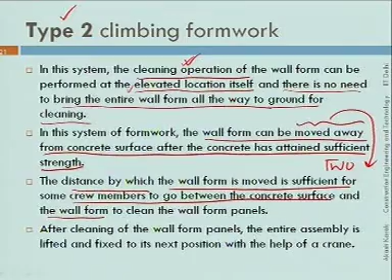In one way, you create a certain distance by which the wall form is moved, so that crew members can go between the concrete surface and the wall form to clean the panels. Once the cleaning is over, the entire assembly is lifted and fixed to its next position with the help of a crane.

So type 1 also requires a crane, and type 2 also requires a crane. But the crane time in type 2 is less compared to type 1, because the cleaning operation is being performed at the site itself.

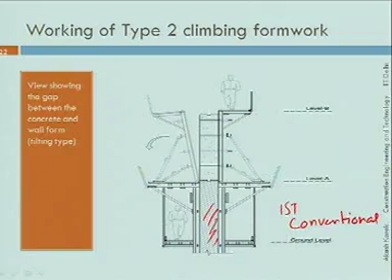I will just show you how it looks like. So the first one or two lifts, you do using the conventional manner. This is done using the conventional manner.

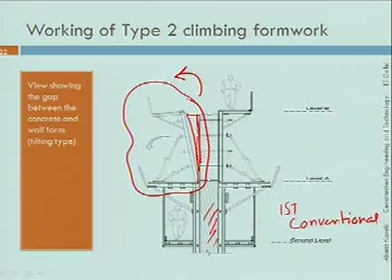Exactly in the same manner you use type 2. Now the only difference is, you can see here, the shutter was like this earlier at the time of concreting, but now it has been tilted, so that this gap has been created, and a person can go inside this gap to clean the shutter.

Is this clear to you? How the cleaning is done? Yes, we are not bringing these panels onto the ground until and unless they are cleaned. The cleaning is done at the elevated location itself, here itself.

Not clear? See, you have a tilting device, this is the shutter, you have some device through which this rotates, and now it takes a shape like this. So there is a gap which can be utilized to clean this portion. Is it clear now?

Cleaning means you have to clean the shutter formwork panels. So, for cleaning, suppose this is the wall that you have cast, and you want to create some gap. Let us say you have tilted the shutter like this. So now this is the gap, and through this gap you can clean it. Is it clear now?

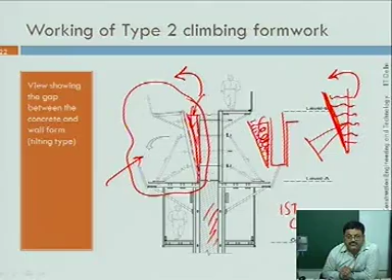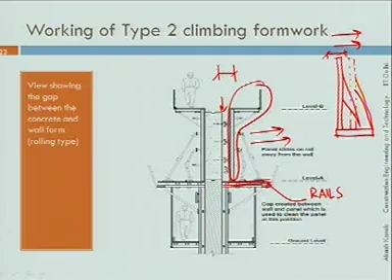Is the slide clear to you? Yes. So what is happening is, you have this shutter here, mounted on rail, mounted on rail. Now, you want to create a gap, so you are moving it backwards. So now the revised position of the shutter is something like this, so that you have this much gap. Is it clear? So we are pushing it away from the concrete wall. Is it clear?

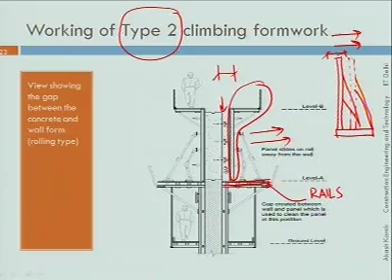Okay, so this is what is type 2 climbing wall formwork. The only difference here is the cleaning is done at the elevated location itself. Cleaning is performed at the elevated location itself.

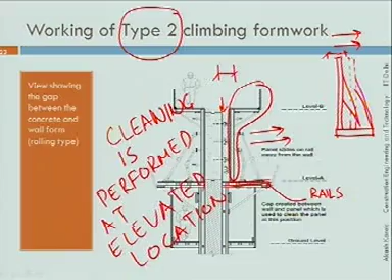Now, once you have done this cleaning, a crane is used to bring this shutter entirely onto the ground surface, and from there onwards the process is the same. See, there can be one more situation in which the shifting of panel can be made directly to the next level. So from here directly you can bring it at this level, no need to take it to ground.

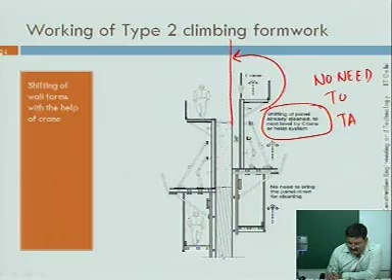Is this clear? Yes. Okay, now the advantage you might have noticed is, number one, scaffolding from ground is not required. Ground is not required. Second advantage is no need to take form panels onto ground. So even if you are working in a congested area, this system is quite useful.

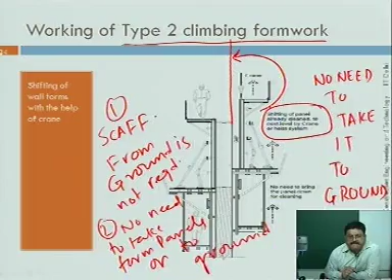So any doubt in type 2 climbing formwork technology class? Okay, then these are some of the advantages I have put down in this slide. The cycle time can be between 2 to 4 days. Cycle time means dismantling of shutter, tying of reinforcement, assembly of formwork, pouring concrete, and then dismantling. So the time from dismantling to dismantling, you consider as cycle time. It can vary between 2 to 4 days.

The crane time is considerably reduced compared to type 1. The system has an inbuilt safety mechanism, so you can work probably at any height, possibly on all heights. So height is not a bar if you are using this system. You can design this system for a wind speed as high as 150 km per hour, so even in very high windy situations you can use this system.

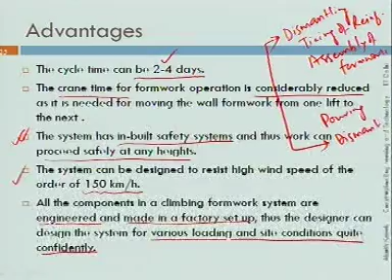All the components in a climbing formwork system are engineered, that means they are designed and made in a factory setup. Thus the designer can have greater confidence and can design it for different loading and site conditions, because now that they are engineered, you can be assured of their properties. So your design will be much more confident. This would not have been the case if you are using, let us say, some timber. Timber is a natural product, there could be large variation in its properties, it could be affected by a number of factors, so you will have to take a large factor of safety there. But if you know the properties of certain materials, you can design it quite comfortably and confidently. So these are some of the advantages of type 2.

The only difference here is the cleaning operation takes place at the elevated location. In some systems there is no need to bring the formwork onto the ground, they can be transported directly from the dismantling location to the next assembly location.

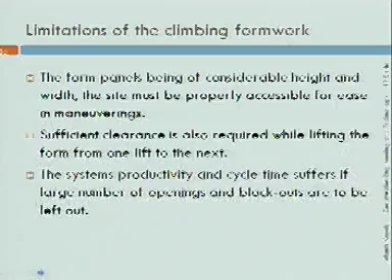Now we move on to type 3. Of course there are certain limitations of this climbing formwork. For example, when these form panels are of considerable height and width, your site must be properly accessible, because otherwise you may not be able to maneuver the crane. Maneuvering through crane would be difficult. Sufficient clearance is also required while lifting the form from one level to the next, because your crane is lifting this, so you should have sufficient clearance, otherwise it will obstruct the lifting by crane.

The system's productivity and cycle time suffers if there are a large number of openings. Suppose you have this wall and there are too many openings, here and here. You will have to make a special arrangement for the formwork for this opening, and so your cycle time would be increased.

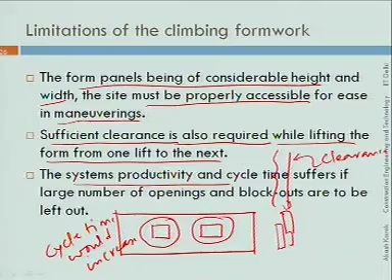Cycle time would increase under such situations. So these are some of the limitations. The site must be accessible so that you can bring in cranes and they can easily maneuver. Sufficient clearance is also required, and whenever your wall has large openings and blockouts, it becomes slightly problematic, your cycle time increases, and you may not be able to take full advantage of this.

Now we see this Type 3 climbing formwork. This is possibly the most advanced version. We also call it automatic climbing formwork. Sometimes it is also known as self-raising formwork. So you call them automatic climbing formwork or self-raising formwork.

Whenever you are using an automatic climbing system, it has an inbuilt climbing device which doesn't require support from a crane, and that's why this is one of the most advanced versions, because it totally eliminates the use of crane. So even at sites where you don't have a crane, this system can work wonders in terms of saving time as well as cost.

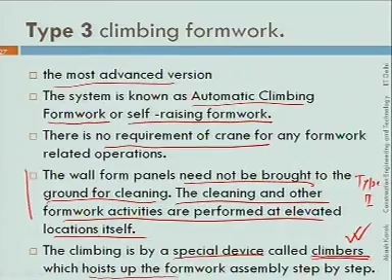Here we have an additional component called climbers, which basically move these formworks in a step by step manner. There are certain additional components needed in an automatic climbing system. As there is no crane requirement, there has to be some means through which the entire system moves step by step. I will show you how it moves.

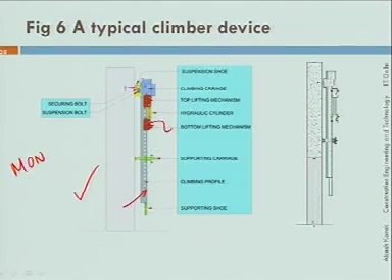Can you see this particular slide? If you look at this figure, you can notice there are two frames, one in this color and the other one here. Basically it is like monkey climbing. You have seen how a monkey climbs? When it is trying to climb, it will have load on two legs, and when it moves up, it will release that pair of legs and keep the entire load on the other.

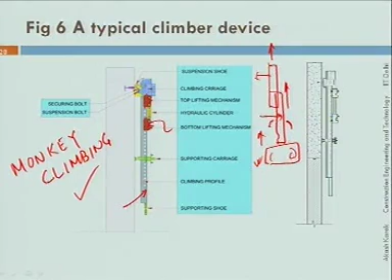On a similar principle, in most of these climbing devices there are two frames - one frame, another frame. While one frame moves, the load is taken care of by the other frame. Once the first frame has moved a particular distance, it takes the load, and then the other leg moves upwards. Can you visualize this? Just try to locate a monkey first and see how it climbs. So this is your next assignment - observe a monkey climbing and compare it with the climbing I have told you about in this lecture.

Now it has certain additional components that I will tell you about. There is first a component called the lifting frame. The bottom supports of the lifting frame are anchored to the previously cast concrete lift. There are hydraulic jacks attached to the lifting frames. The jacks pull the entire form system to the next lift location. So one very essential component here is the jack, which you can consider as the core of the whole system. These jacks are used for pulling the entire form system to the next level.

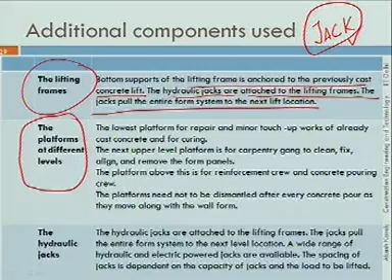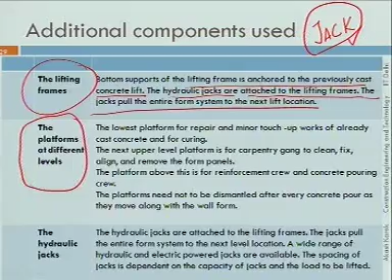As I will show you in the next few photographs, there are various platforms at different levels in these systems. I will tell you how many platforms there are. The lowest platform is used for repair and minor touch-up works. So we are at this lowest level.

Then the next upper level platform is used by the carpentry gangs for cleaning, fixing, aligning and removing the form panels. So this is the lowest, then second is for carpenters. Now the next platform above the carpenter's platform is used for the reinforcement crew and concrete pouring crew.

Now there is one additional platform which is used for climbing operation, where you operate these jacks. There is one more platform which is used for curing. So I told you about five platforms that can sometimes be there in an automatic climbing wall formwork system. I will show you a picture and then it will be clear, so wait for that time.

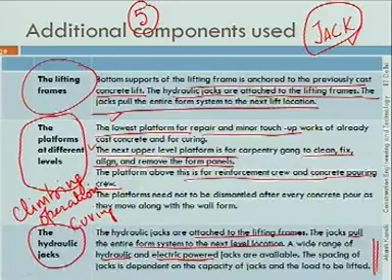As I told you, the hydraulic jacks are attached to the lifting frames. These jacks pull the entire form system to the next level location. There are different types of jacks - they could be hydraulic or electric powered. The spacing of jacks and their capacity is decided depending on the load that it has to lift. I will tell you how to design these jacks, how to find the right spacing depending on the load it has to lift upwards.

So there are few things which are additional in this automatic climbing formwork system. Number one, the lifting frame. Number two, the different platforms. Number three, the hydraulic jacks. These three components are additional in any automatic climbing wall formwork system.

There could be as many as 5 platforms, the lowest being used for curing, the next one may be used for repair and minor touch up, the next one can be used for lifting arrangement, that is your jacks may be positioned there. The fourth platform can be used by carpenters for cleaning, aligning, assembling of formwork, and the top level platform can be used for reinforcement gang as well as your concreting crew.

Now I will show you some more aspects of this type 3 climbing formwork. These formworks can be customized for a wide range of applications. Some of the applications that have been reported for these type 3 climbing formworks are pylons. You might have seen pylons which are very large structures, used for different purposes. You can use it for bridge piers.

You can use them for lift shaft. Lift shafts, you will find, are one of the most critical activities in a multi-story building. If you are constructing a multi-story building, you will find that it doesn't take much time to cast these floors, but when it comes to lift shafts, it takes a lot of time. So sometimes people use automatic climbing wall formwork for casting these lift shafts.

There are special automatic climbing formwork which can be used for constructing this natural draft cooling tower. You might have seen a structure like this, a natural draft cooling tower - they could be as high as 120 to 130 meters. They are used mostly in power plants for cooling of hot water.

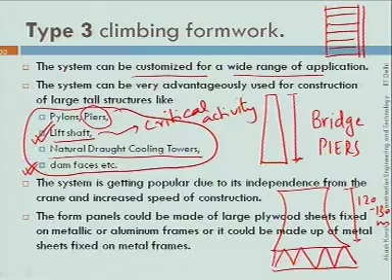You can also use this system for some dam faces. So while constructing the dam, you can use this automatic climbing wall formwork for achieving faster rate of construction. Nowadays you find there are lots of applications of this automatic climbing wall formwork. The reason is you don't require any crane, and still you can get very high speed of construction.

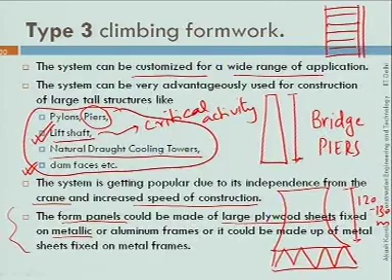The form panels used in this system can be either made up of large plywood sheets, or it could be metallic, made of steel, or maybe aluminum frames. Now I will show you how this system works, in a step by step manner.

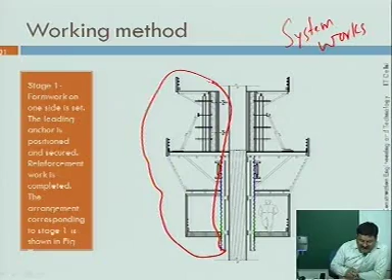Now, stage 1, you can see you have fixed these formworks on one side. Now, there is a device called leading anchor. In one of the lectures, I will give you the diagram for these anchors, climbers. I will give you the detailed dimensions and how they look, so that it becomes clear to you. But for the time being, just understand that there is a device called leading anchor that has to be fixed and secured.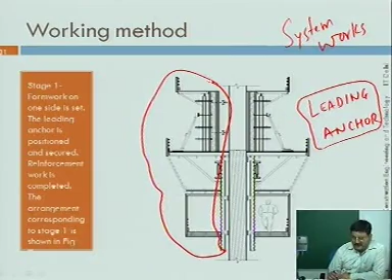This device, you are fixing it - suppose you are casting this portion, so your device should be somewhere here. Now this will be concreted. After you have removed this shutter piece, the climber device should be attached on this. I will show you how it looks like.

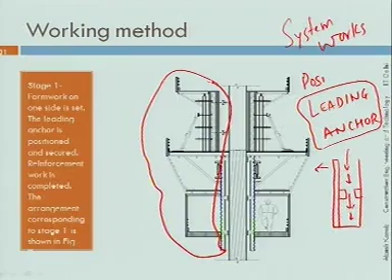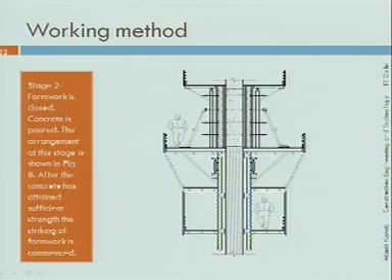So, stage 1 is formwork is set, the leading anchor is positioned. Stage 2, you close the formwork. So you can see now this formwork is closed, ready for concreting. So you are pouring the concrete through this. Till here it is clear, technology class?

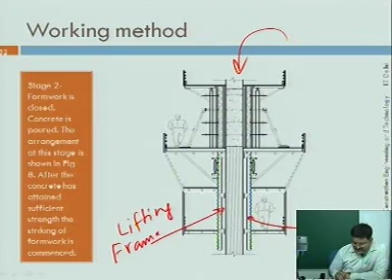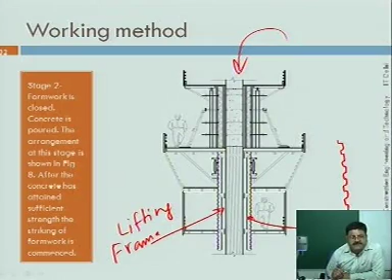You may notice this lifting frame, on both sides. It has got a thread on this, something like this. Now, before fixing this lifting bracket, lifting frame, you may have to do 1 or 2 castings using conventional method.

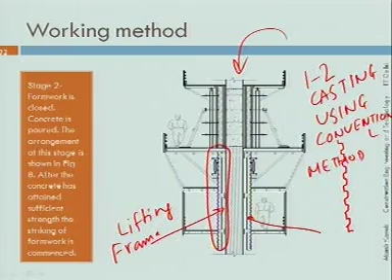This step is the same. First, you are casting one or two pours using the conventional method, then fixing this lifting frame, positioning the leading anchor, then closing this formwork and concreting the pour.

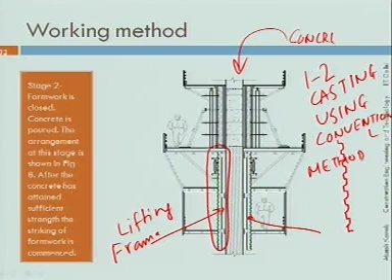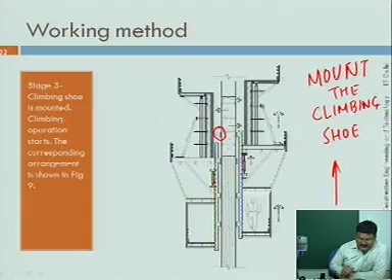Now let us see what is the next stage. Now the climbing shoe is mounted. You can note here, this is the climbing shoe. There is a device called climbing shoe. So you mount the climbing shoe, and on this climbing shoe itself the climbing operation starts.

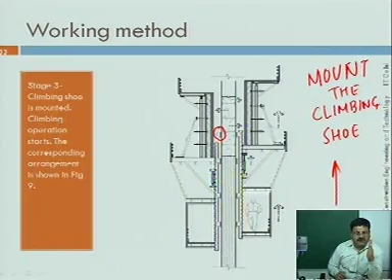If you just look at me, you have mounted this climbing shoe which is on the concrete surface, and then the bracket, then the lifting frame moves upward like this. Suppose you have this concrete surface. I have attached the climbing shoe here, and then my lifting frame moves on top of this, slides on this, not suddenly but in a step by step manner. So first I move one frame, then fix the load, then another frame starts moving, then the first one, then the second one. Is it clear to you, technology class? So this is how it moves.

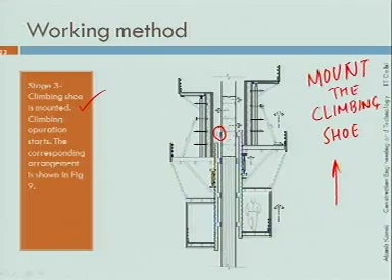I am trying to arrange one video which will show you how the actual climbing takes place, then it will be more clear. But for the time being just understand the various steps that you need to take. So in this particular stage climbing shoe is mounted and the climbing operation starts.

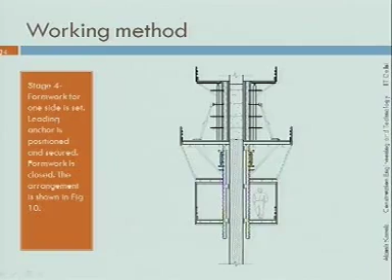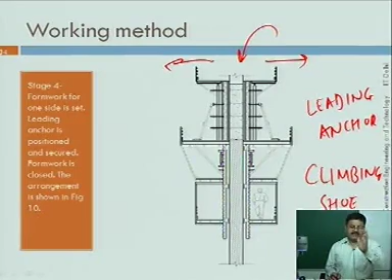Stage 4 is again now repetition. Leading anchor is now positioned, formwork is closed, concreting is done. Then after it has set, you move it this way, clean it, fix the climbing shoe, and start climbing. So after every lift, or maybe 2-3 lifts, you put the climbing shoe depending on the height of your frame, and then it can move upwards.

Now I will show you some application of these patented wall formwork. In this particular slide, you can see this L&T wall formwork. L&T is basically Larsen and Toubro. They manufacture formwork, different types of formwork. They have a license and arrangement with Doka of Austria, which is a leading formwork manufacturer.

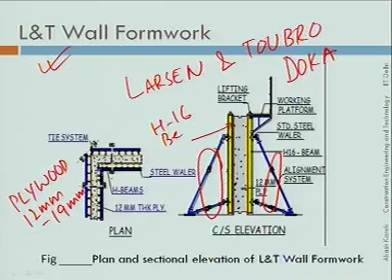Now in this system you can see you have these alignment props on both sides, then you have a plywood either 12 mm or 19 mm. Then you have this yellow color beams called H16 beams. I have already explained what these H16 beams are. Basically they are something like this, with a depth of 160 millimeters, 16 centimeters. That is why they are known as H16 beams.

You can see the working platform. Although in this figure I have shown it only on one side, they can be kept on both sides as well. You can see it has a lifting bracket also, so if you want to handle them using cranes, you can do so. For corners, you have a tie system here, so that you can either form a right angle corner or any other angle that you want.

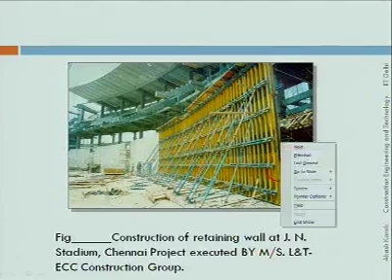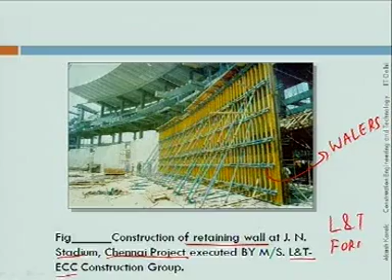I will show you some actual site photographs. Can you see this? Yes, so this is using the same system. Here walers are seen quite prominently. These are walers. This is basically one stadium wall, retaining wall of a stadium. It was constructed in Chennai by the same company using the L&T formwork. You can see the height is about 1, 2, 3, 4, 5, about 6 meters. So a 6 meter wall done in a single pour.

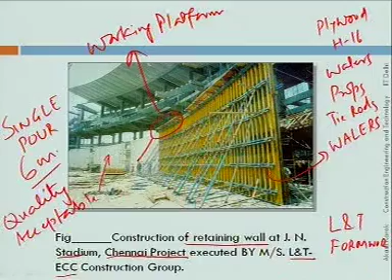You can see the appearance, although it is not that very clear, but you can see the quality is of acceptable level. Using the same component, I will list out plywood, H16, walers, props, tie rods. You can note the working platform here. These are the working platform. Clear? Any doubt?

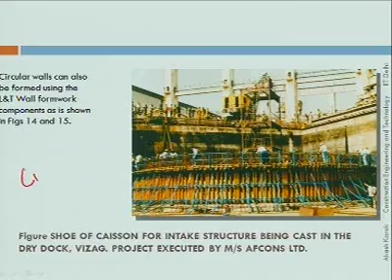These are some more examples of the application of L&T wall formwork. You can see this circular wall also you can cast using the same components. Here you can see this is a large diameter intake structure. This was done by a company called Afcons. You will notice that the same components have been used which I showed you in the previous slide.

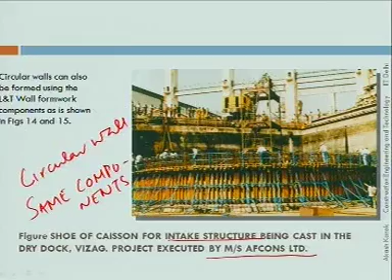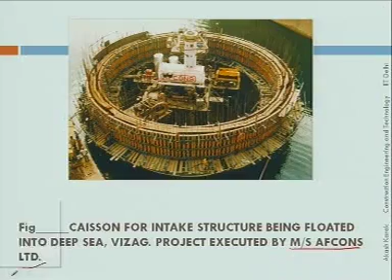Some more applications here. This circular wall is very clearly shown. This is again constructed by Afcons using this L&T wall formwork.

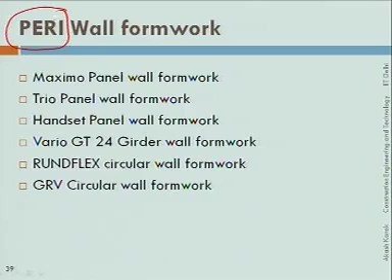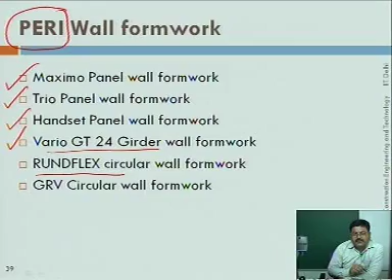Now I will show you some systems developed by a company called PERI. It is a German firm, and they have different systems for different applications in wall formwork, with different trade names. For example, Maximo panel wall formwork, Trio panel wall formwork, hand set panel wall formwork, Vario GT24 girder wall formwork, Rund Flex circular wall formwork for circular applications, and GRV circular wall formwork. I will show you features about these systems briefly, along with photographs.

You can notice this, this is the typical Maximo panel wall formwork. Using this system, you can generate a very high construction speed, and thus have a saving in time and cost. It does not require spacer tubes, which is the peculiarity of this system. Spacer tubes, as I had shown you, are basically to maintain the distance between the inner and outer surface. This system does not require them, and you can notice the ties spaced at regular intervals. So when you remove this form panel, you find a very nice pattern on your concrete surface.

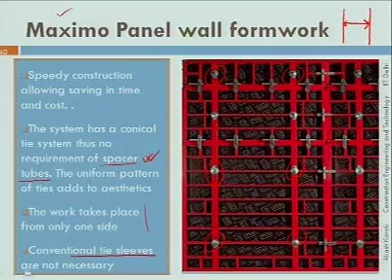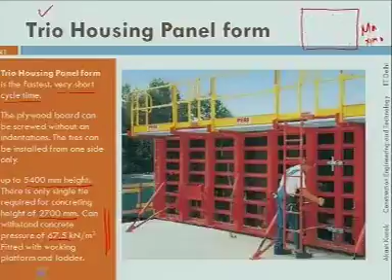You can find more details on these forms by visiting their websites. I will just quickly take you through the various systems.

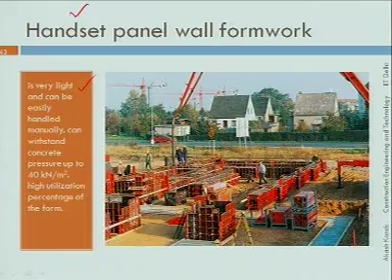Then for manual application, they have this system of hand set panel wall formwork. These are very light, which is why you can use them manually. This can withstand a pressure of up to 40 kilonewton per meter square.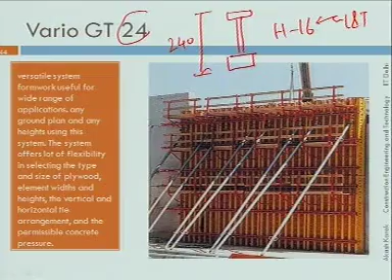Then coming to this Vario GT24, you will find that the depth of this component is very similar to H16, but here the dimension is 240 millimeter. This system was made by L&T, and is also being manufactured by Doka, but when it comes to Peri, they have it in 240 millimeter depth.

This is a very versatile system; you can use it for any application, whether with plywood or with varying heights, all those things are possible. You can design them for different concrete pressures. In all these systems, they are fitted with working platforms and ladders. One thing you can notice is that these beams are of truss shape. If you see the GT24 beams in elevation, they are like this, whereas H16 in elevation was plain, whereas this is kind of a lattice structure, and you can see this in the corner portion. Can you see this arrangement, technology class?

Yes, okay. Then for circular applications, Peri also has certain systems.

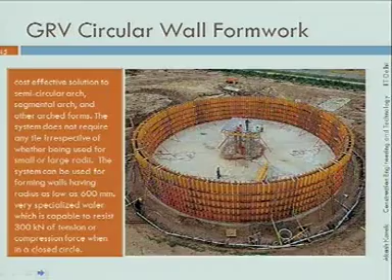What I will do is send you the features of these different systems which you can go through. The idea is you should be familiar with some popular formwork systems, so that whenever the need arises, you can select the best out of these companies, out of these products, as per your requirement.

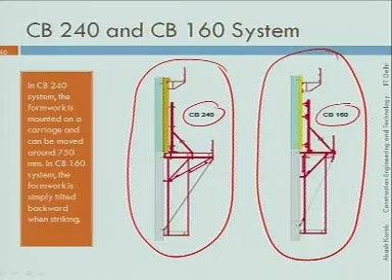Now these companies also manufacture climbing systems. The two types of climbing systems developed by Peri are shown in this slide: CB240 and CB160 system. In CB240, the width of this platform is 240 millimeter, and in this other system, the width of the platform is 160.

The width of the platform is 160. For cleaning purposes, you can create a gap of about 750 millimeters, so these shutters can be moved backwards by about 750 millimeters, making cleaning very easy at the elevated location itself. You can see how the panels can be lifted using a crane.

Is this clear to you, technology class?

This is the bracket on which the entire load rests. These are the brackets. This is supported on the ground, on the concrete surface which is already cast, and then you put the shutter here. So this is how it looks like.

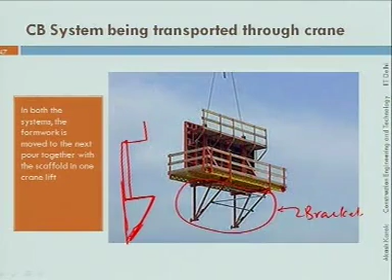Is this clear to you, technology class? Yes. Okay.

Now I was talking to you about this automatic climbing formwork system. They also manufacture this system. One system they call RCS formwork.

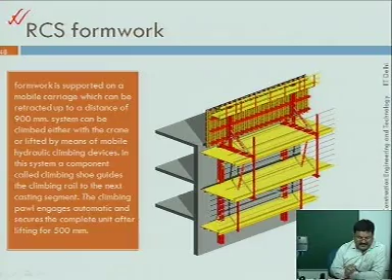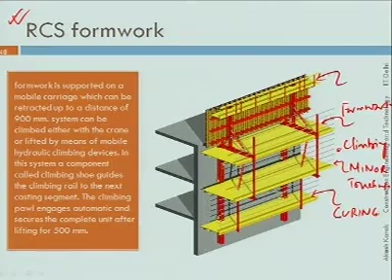Now you can see the number of platforms. Maybe this platform you can use for curing. Maybe this one you can use for minor touch up, and maybe this platform itself you can use for climbing. This platform you can use for formwork, and this platform for reinforcement and concreting.

So you can note these things. Okay.

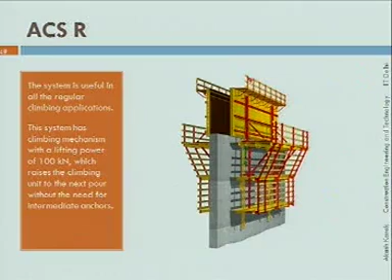This is another variant. They call it by this name, ACSR. So you can see using the same components which they had used for previous systems, and adding a few more components such as the lifting frame,

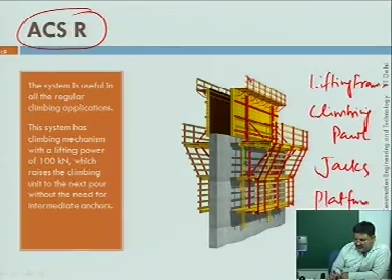the climbing panel, the jacks, and platforms, they are able to create a very powerful system which you can use for virtually any kind of climbing applications. This is possible.

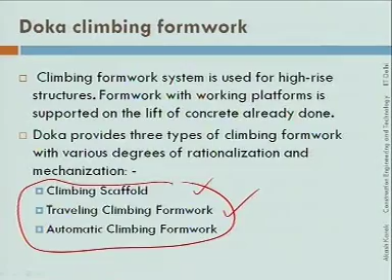Now Doka also manufactures different types of climbing formwork under these brand names: climbing scaffold, traveling climbing formwork, and automatic climbing formwork. The principle is the same. I will show you some photographs.

Some site applications, you can see for these climbing formworks. You can see this shutter, this formwork. This is a traveling climbing system.

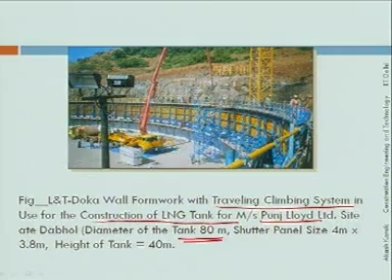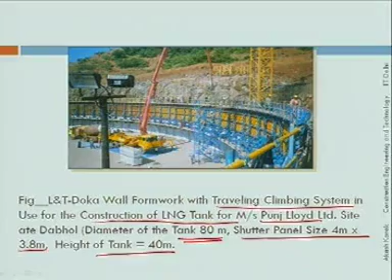This was used for the construction of an LNG tank by Messrs. Punj Lloyd Limited. The diameter of the tank, you can note, is 80 meters, and the shutter panel size used was 4 meter by 3.8 meter. The height of the tank is 40 meters. So under such applications you can think of these systems.

Again, this is another view. You can see the shutter has now moved to this location. The same sizes of shutters have been used for casting this tank of 80 meter diameter and 40 meter height.

So these are some examples of proprietary wall formwork. I have discussed all three types of climbing formwork: type 1, type 2, and type 3. In type 1, the cleaning operation is performed at the ground level.

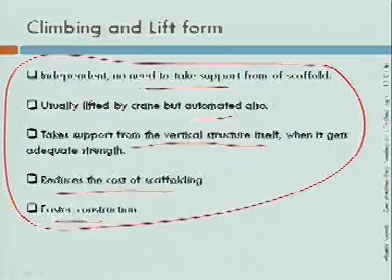In type 2, you can either roll back the shutter or tilt them. And what happens in type 3, you have a few more additional components such as the lifting frame, the jacks, and the various platforms. So using these climbing devices, the entire assembly can move in a step by step manner, and you can achieve virtually any height.

You can work safely even if you are facing a very high windy situation. You can design these shutter panels even up to a wind speed of 150 km per hour.

In the next lecture, I will be telling you how to design wall formwork. So if you have any doubt, please feel free to ask. Thank you.

No question, sir. Okay. What I would request you is to just search the internet and try to figure out what manufacturers are supplying products in your country. Okay, so that you can know.